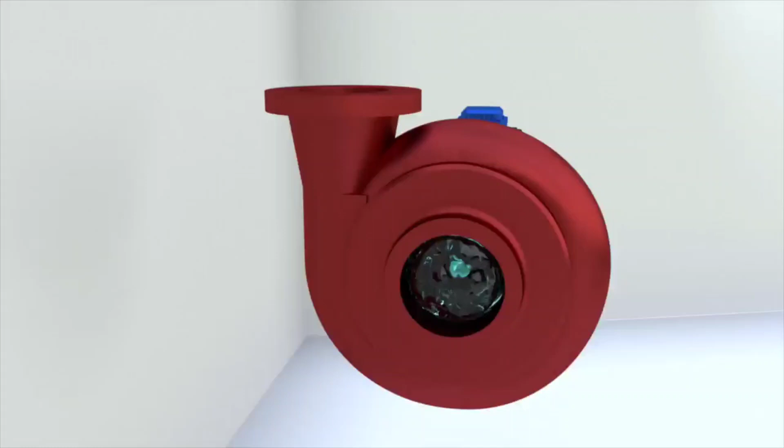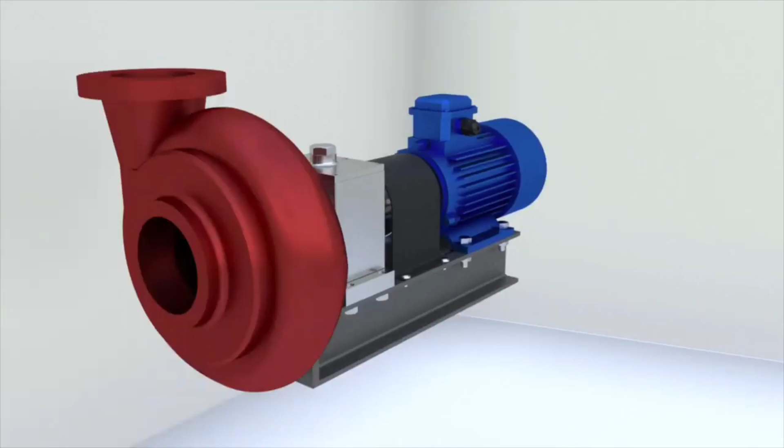How does a centrifugal pump work? Centrifugal pumps are used to pump water, oil, and other liquids. Let's try to understand why these pumps are designed to carry out the task of transporting liquids successfully.

The main elements of a centrifugal pump are the casing and the impeller, which drives the liquid. The impeller is mounted on a shaft, which can rotate on bearings. The power is transmitted from the motor, most often an electric motor, to the shaft.

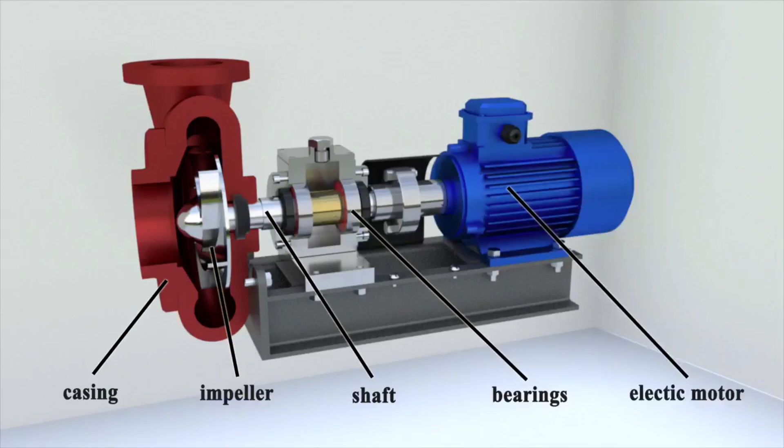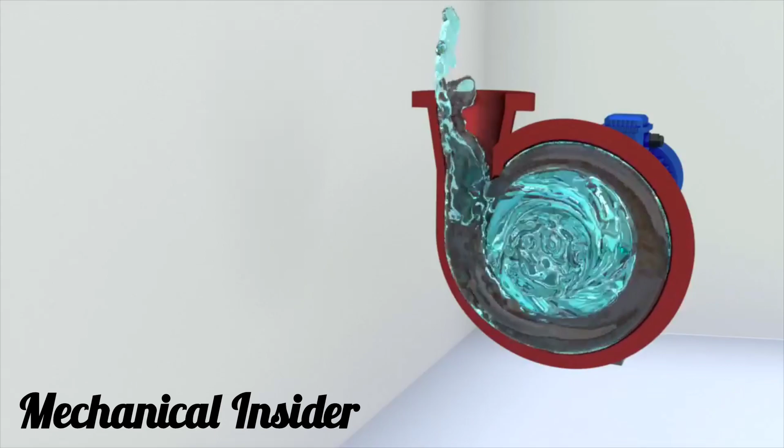The impeller of the pump rotates together with the shaft. The vanes in the impeller act on the liquid and make it rotate. The liquid particles are accelerated, and as a result of the impact of the vanes, the energy of the liquid flow is increased.

The accelerated liquid particles enter the volute, which converts part of the velocity into pressure. The diameter of the passage section of the volute in the discharge nozzle gradually increases. The fluid velocity decreases, and the pressure, according to Bernoulli's law, increases.

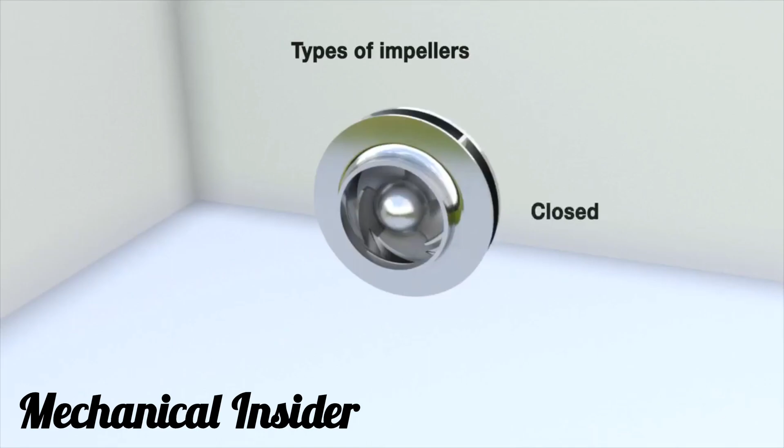Three main types of impellers are used in centrifugal pumps: closed, with back and front discs, vanes and fairings; semi-open, with the vanes free on the front side; and open, with the vanes free on both sides.

If bearings support only one side of the shaft, the pump is called a cantilever pump. It is a versatile design that is used in small and medium-sized pumps. A heavy impeller cannot be cantilevered.

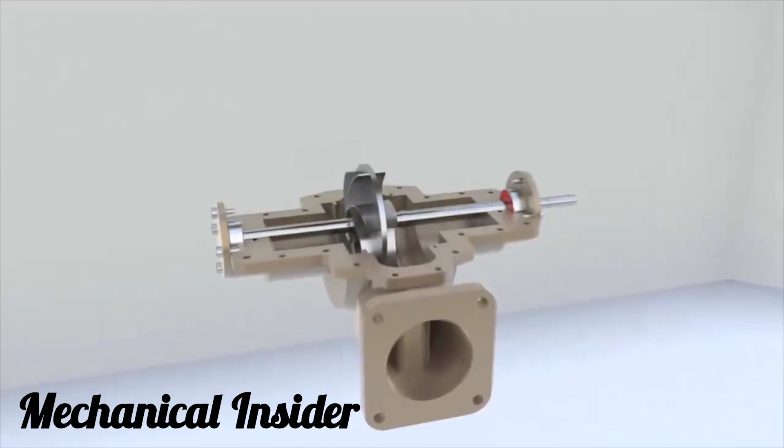In this case, the shaft is mounted on bearings and the impeller is placed between them. This construction scheme is well suited for double suction impellers, where the vanes are placed on both sides. A double suction impeller allows liquid to enter the impeller blades from both sides.

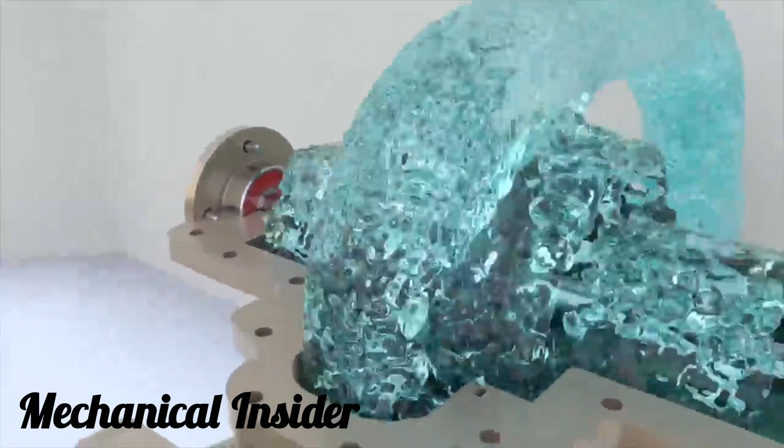Thus, we have two pumping units without significantly increasing the weight and dimensions of the pump. This scheme is relevant for pumps with high capacities because the pumping units are installed parallel.

Multi-stage centrifugal pumps: by installing pumps in series, the head of the liquid can be increased in the system. Pumps installed in series can be combined by placing several impellers in the same casing. The liquid will go from the first impeller to the second one, from the second impeller to the third one,

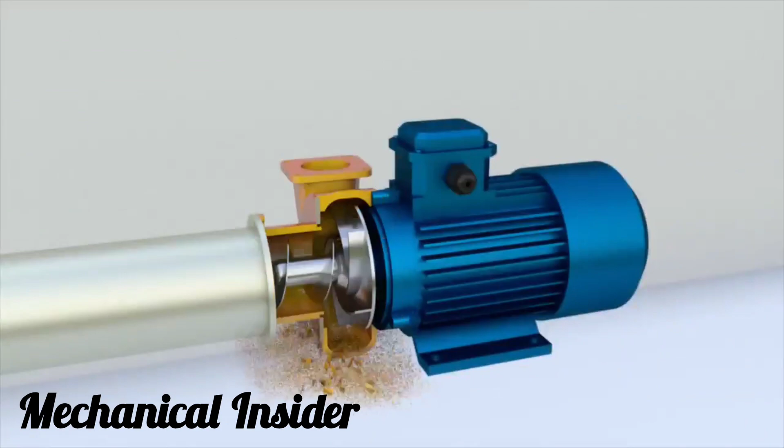and so on. Using a multi-stage arrangement can increase the head of the pump many times over, as the impellers are mounted in series, and each of them increases the head.

In multi-stage pumps, different impellers can be used. For example, a screw centrifugal pump has an auger on the first stage and a centrifugal impeller on the second stage. When the pump is running, the liquid flows continuously into the pump casing through the suction nozzle.

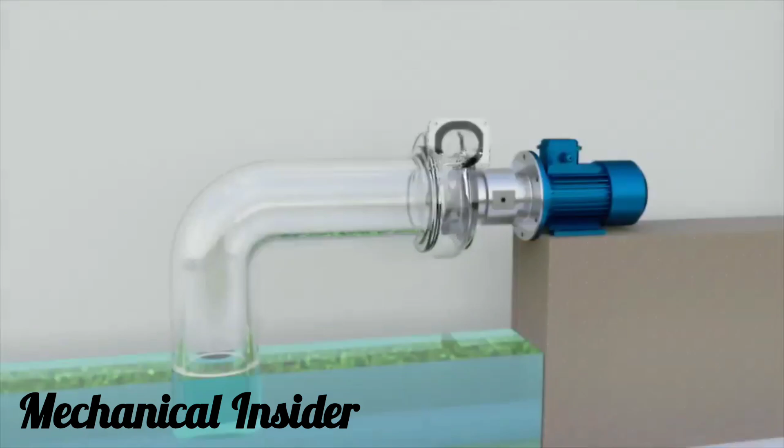But what happens if there is no liquid in the pump? For example, when the pump is first switched on, the pump casing will be empty. For the liquid to fill the pump, the pressure in the pump casing has to be lower than the atmospheric pressure. Then, the atmospheric pressure will cause the liquid to fill the casing.

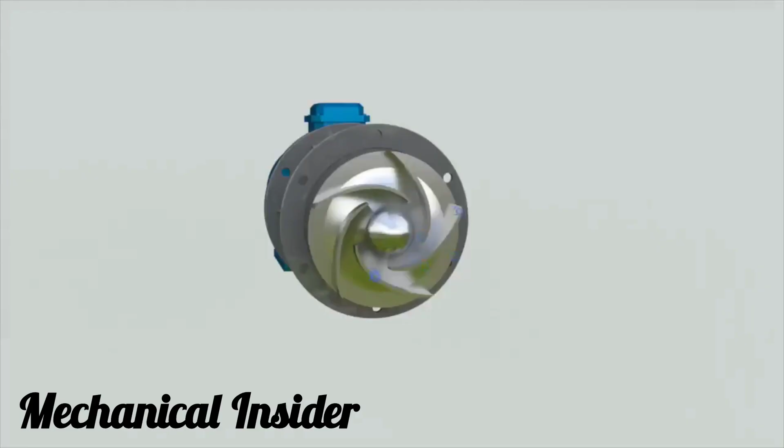To reduce the pressure in the pump, some of the air has to be pumped out of the casing. Is an ordinary centrifugal pump able to do this? The answer is no, because the particles move in the pump due to inertia, which depends on mass.

The mass of air particles is much lower than that of water particles, so it is impossible to pump air at speeds that a centrifugal pump operates at. For this reason, centrifugal pumps must be primed before switching on, either through a special channel in the casing or